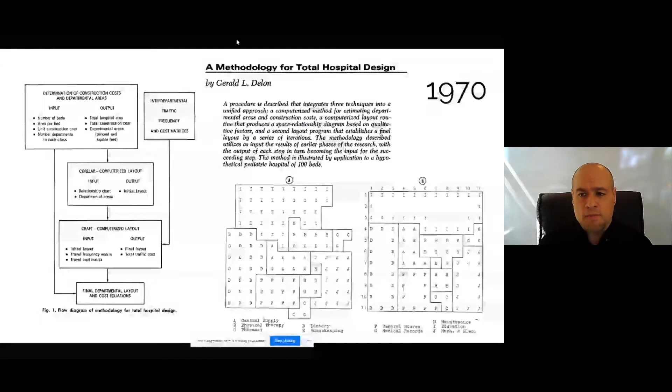So why did we found our company? We have a basic conviction that after working on buildings for 5,000 years as a species, and 50 years of trying to use computers to create architecture, we should be able to start with something a little better than a blank sheet.

Because we think one of the issues in the industry right now is that there's a lot of expertise out there and it's still residing in people's heads. The only way to start delivering that in some widespread fashion is to automate expertise from the source, whether it's people starting out in their careers or folks who have a bunch of projects under their belt and a lot to share.

So how do we do that? What is Hypar? How have we tried to answer some of these challenges in the industry where we're still working off the equivalent of a blank sheet on our computers? You may have dealt with a bunch of different cloud services as we increasingly move to the cloud. They tend to be very targeted towards specific purposes.

Hypar is a cloud platform for generating building designs from crowdsourced expertise. We are trying to provide a way for the industry to marshal and share its expertise while protecting its IP.

And the way we're doing that, I'm going to take you back to math class. You may recall that you had these things called functions, and functions would take inputs of one kind or another—in math, numeric, obviously. But in Hypar, those inputs translate into things like structural systems. And those inputs can also be the outputs from other functions, say something that generates a building envelope.

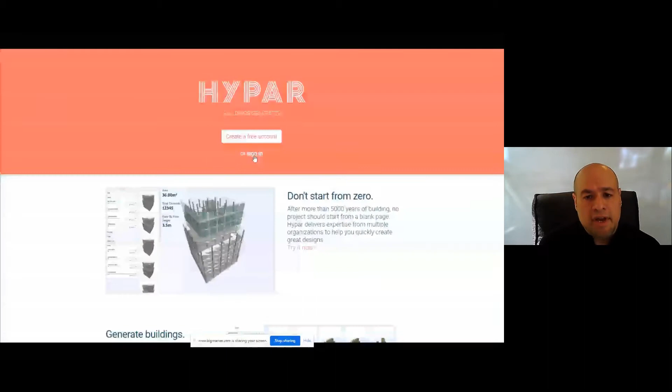But first, I want to show you how that works in practice. So this is kind of a speeded up video that we'll dissect a little bit.

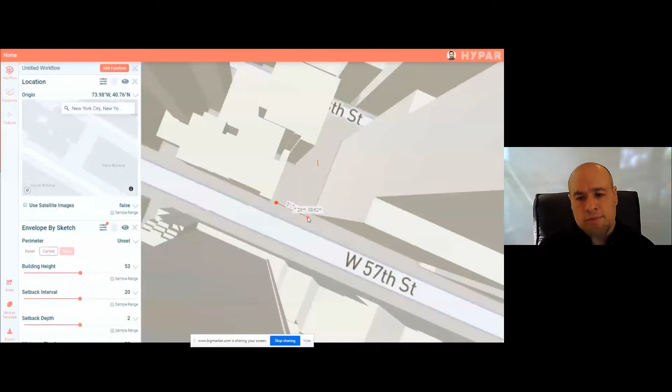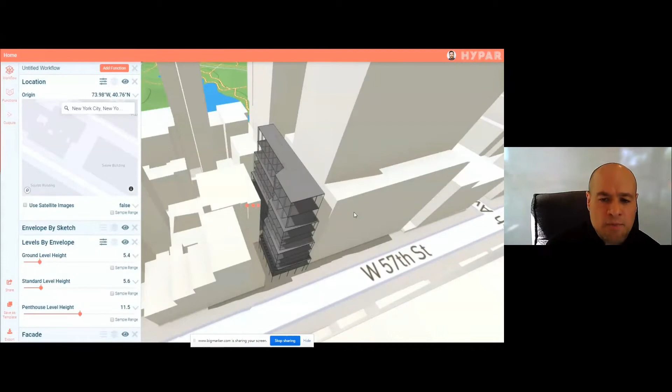And that gets us there. Now we'll start adding other functions that add their own piece to the model: levels, and then floors, a facade, a structure. And you can see pretty quickly you come to the point where you start to have a building proposal.

And then we can do things like analyze one aspect of the building's performance. In this case, what's the view radius at a certain building height look like? And here we see if we stand in just the right spot on just the right floor, we get a view of Central Park in Manhattan.

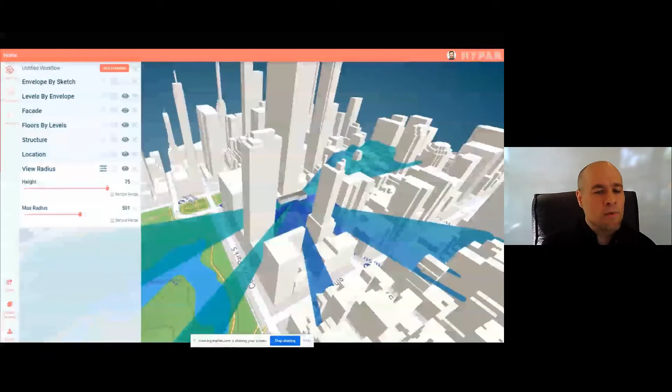So what I'm going to do here is switch over to a live demo and dive into a similar workflow so we can take that apart and see what's going on.

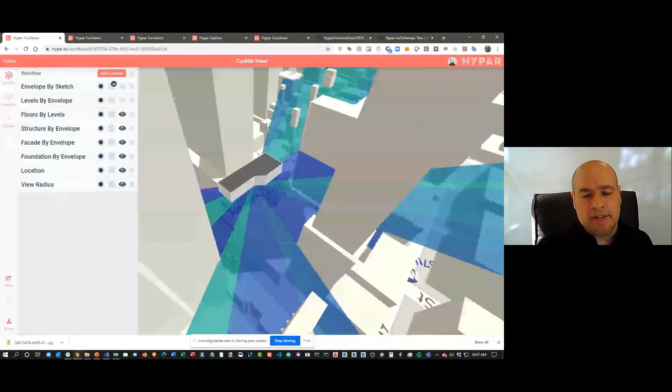So this is our CanBIM tower, same place in Manhattan. And each of these is a function. There's a library of functions you can access that contribute various things to the model, but each of those functions also has its own settings.

So if we do something like make the building taller, for example, we can change our setback intervals on how often those happen. What's happening here is that we're creating a new envelope, and every one of the dependent functions down here, which makes levels and floors and structure, etc., is now working off the new building information.

So what we can do also is when we have things like sample range checked off, we can also look at a bunch of different options that have been automatically generated, because one of the benefits of having a cloud system is you're not limited to a single CPU.

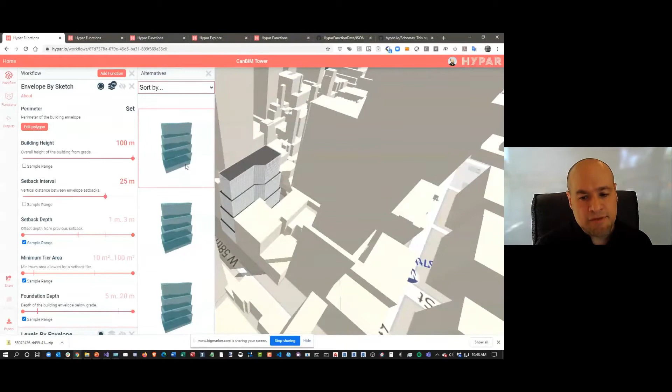So what we do is distribute calculation of options across multiple CPUs. So calculating 20 different options is as fast as calculating one because they're distributed.

So we could even switch off to something maybe dramatically different. Let's see if we can find one of the ones across sample range. Let's try this one with four tiers, and we'll let that regenerate.

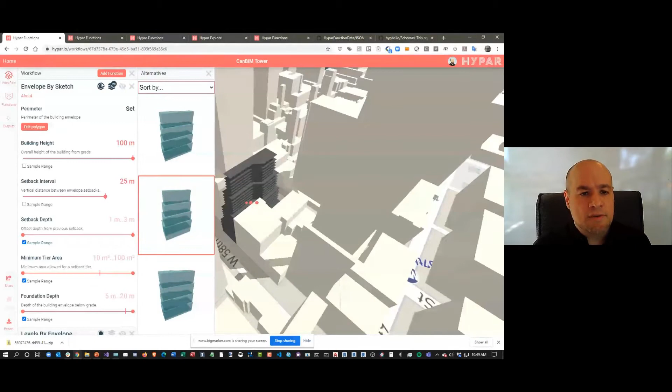So these kinds of options are available in every one of the functions. You can change your level heights here. You can change your floors by levels, and you can change your structure. Let's look at each of those in isolation for a minute, so you can see how each one contributes to the model.

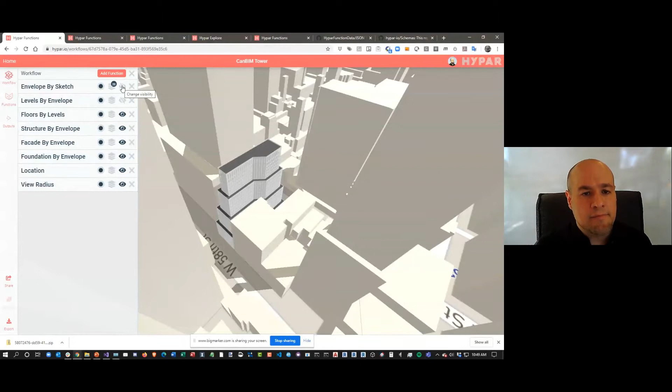So we can isolate each of the functions' output like this. Here, we're not even seeing the location. Now we'll just see the envelope regenerated, and here are the levels and the floors. There's our relatively simple structure. You can see that we just have axis intervals that we can set.

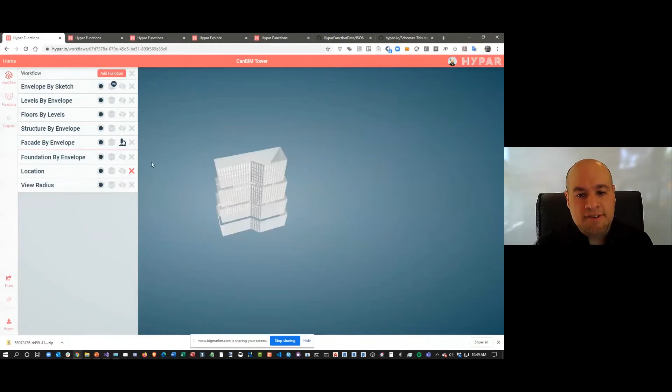Now, all of these things you're seeing here are all available to you on Hypar right now. And if you have a mind to contribute, one thing you can do with a lot of the functions on Hypar is go to About, and often you'll see a source code link. So if you are C# code inclined, you can open another window, and this will take you right to the source code of the function you were just using.

Now, all of this is open source. None of it is directly tied to the Hypar platform. You can use this stuff locally if you like, and I'll go into more detail about that when we talk about what's behind all of this functionality.

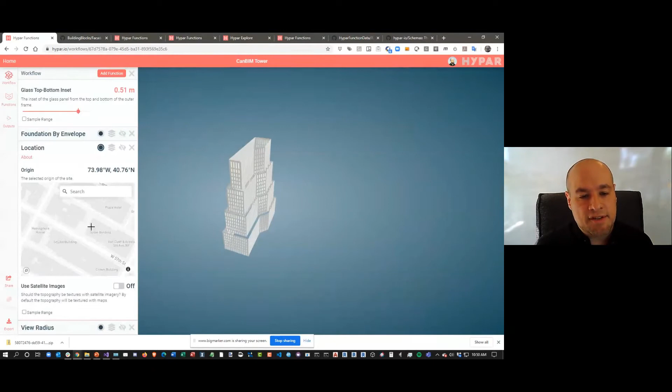Continuing on, we can do things like select different locations, and we can move this entire building to Tokyo if we wanted to, for example. So you have worldwide access.

Now, I will say that we're drawing our information from Mapbox. Your mileage may vary on the validity of the information depending on where you are. We find some really good data in large cities around the world. When you start to get outside urban areas, or even sometimes in secondary cities, the building heights get a little shaky. Just a word to the wise on that.

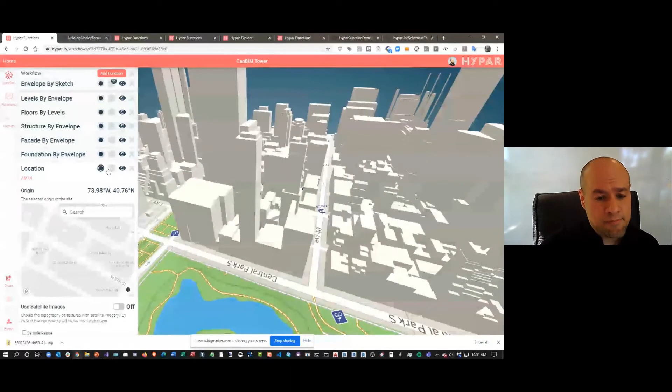Going back to what's underneath here, I'm going to go back to the presentation. So the reason all these functions get to talk to one another and pass off information is, let's say for example, I take out levels. Everything is going to start to complain that it's using levels and needs them, and we can always add those back in.

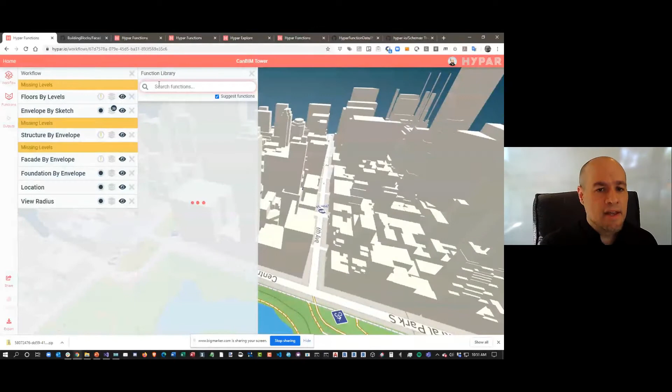But the reason that all this stuff can talk to one another is there's a library underneath which represents the building elements. It's things like site and level and envelope and all the stuff you see me play with here.

This is also an open source library. It is also not tied to the Hypar platform. We have seen people take this library and use it as the basis for operations in Dynamo or Grasshopper, and we'll talk a little bit about that.

But you can take this library and extend it if you're a C# developer and use it to your heart's content. If you have no connection to development at all, you can go to Hypar and use all the functions that people put on there to create your models.

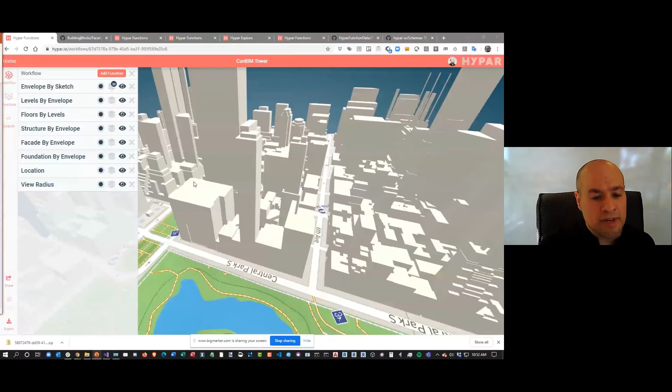And when you finish, I save some time here by exporting, so it takes about 45 seconds. But one of the things I did was export this model as an IFC. And we'll let BIMvision open this up.

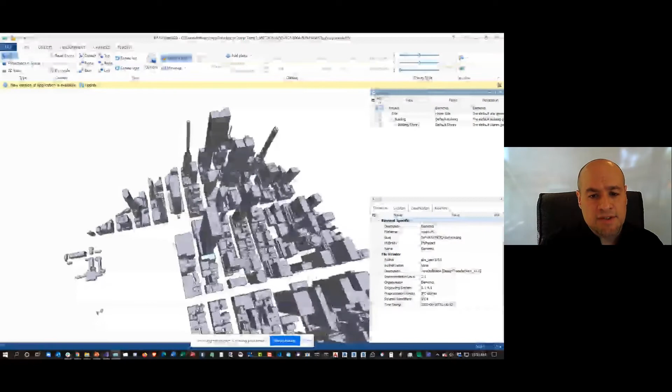And here we've got the whole area, including our building, which is hidden down one of these, next to one of these tall guys here.

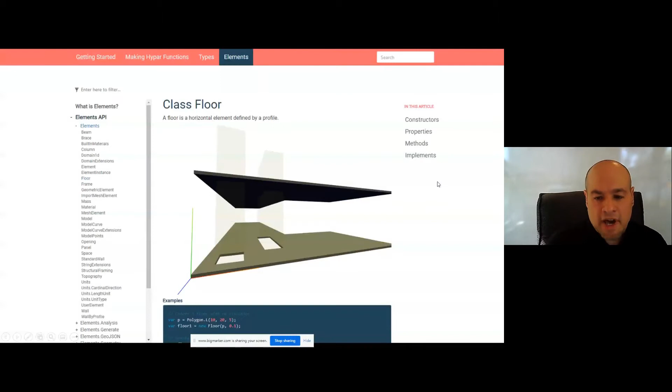Okay, so going back to the presentation, we've got a lot of ways to help you on Hypar. We've got a getting started guide that will let you also extend this data model.

So one of the issues with a lot of data models in AEC is that they come very rigidly categorized. So you end up having to categorize something the developers didn't conceive of. Let's say, on the outside, you have something like an umbrella stand, or an operating room, or a patient room that you want to represent. And of course, large pieces of commercial software can't think of every single thing you want to represent.

So one of the things we did with the Elements library is we made it extensible. So if you add something to the Hypar Elements library, you don't have to talk to us about it. We never have to know you even exist, but you can actually make a first-class element that the platform will recognize, or the rest of Hypar will recognize if you're using it just on your desktop.

If you're interested in how that works and you want to develop it yourself, there's a GitHub repo called Hypar-IO schemas. These are individual schemas that describe things like levels, level perimeters, mullions, the building envelope, etc. You can see how that's done.

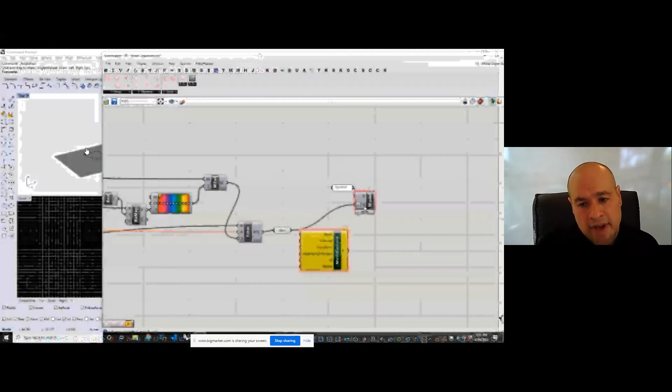So one of the things we've added recently is Grasshopper compatibility. Here, Andrew Heumann, who's on our staff, is working on a Grasshopper script that generates a mesh skin for a building, and then he'll add some rainbow colors, and you'll see it flash in the upper left corner as he adds them.

Then he takes the Grasshopper script and adds a new function, and he just drags and drops it right into Hypar, and given a few seconds processing time, we'll actually wrap that graph up into a functioning Hypar entry. The nice part about this is that now it will work with all the other Hypar functions.

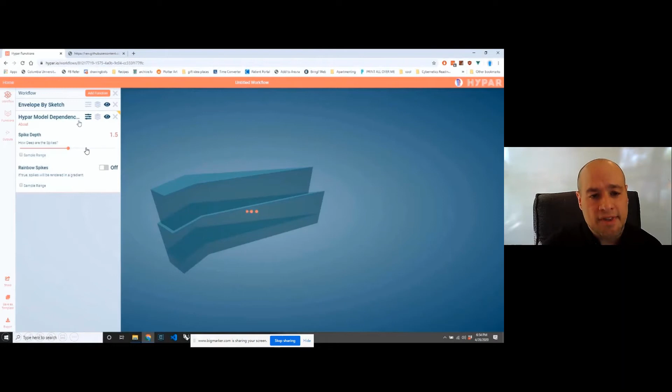So here, envelope by sketch, written in C#, is now working with this Hypar model dependencies thing that Andrew's created, to add this rainbow facade onto that building envelope.

So your third alternative for putting something up on Hypar is using Excel. By naming cells in Excel by inputs or outputs, we can automatically translate this into the Hypar interface.

I think I probably don't have to outline for this audience the nightmare of the emailed spreadsheet that gets out of date and numbers change, and you're making business decisions on the basis of it, and maybe you make the wrong one. This is another way to distribute just a raw spreadsheet around a company so that people can use a canonical copy of it.

And you can make some adjustments to the spreadsheet and how you want the interface to work on the way in. What's coming, hopefully at the end of this week, is an ability to hook this directly into outputs of the rest of the model.

If you wanted to feed in your square footage or square meterage from your building and get outputs like your cost basis, your loan value, etc, and what your projected income would be, you could make a spreadsheet like this. We did that because we know there's a big chunk of expertise in the AEC industry residing in spreadsheets spread around firms, especially in engineering and real estate.

There is a Grasshopper package up on Food4Rhino called Hypar Elements that will supply you a bunch of pink-outlined nodes you can use to integrate with Hypar. We have instructions on starting with Excel. There is a Hypar Dynamo package on the package manager if you're a Dynamo user, and there is a sample Dynamo script to show you how to extract information from Revit.

So I'm going to pop into the live demo again to show you how that works, or at least the results of it.

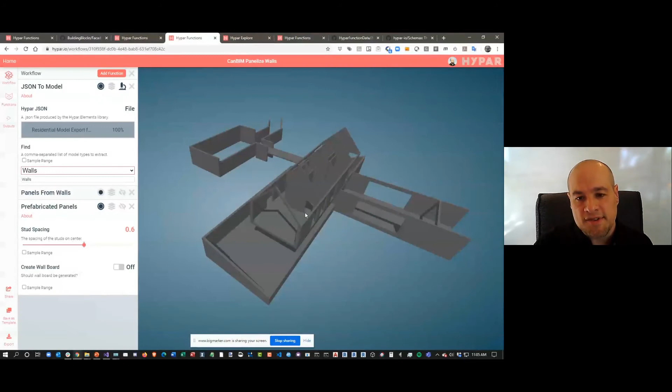Those of you familiar with Revit will probably recognize this guy. This is the architectural house that comes with Revit as some of the default content you can use. What we've done here is use a Dynamo graph to extract walls and floors out of Revit, and we'll talk more about that in a second. Then we've dropped it in here.

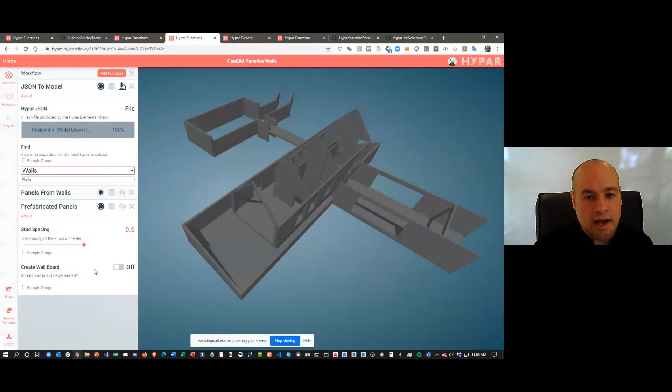I'll do it live in a second. Let me show you some other results. What we've got here is three functions: one, this JSON to model that I'll explain in a moment; one, panels from walls; and one, prefabricated panels.

If I isolate each of these in turn, you'll see that we've taken the walls and floors we extracted from Revit and isolated that. Now we've panelized all the walls here according to the length and corner length in the function. And if we isolate prefabricated panels, we'll see that we also have framing inside every one of those panels.

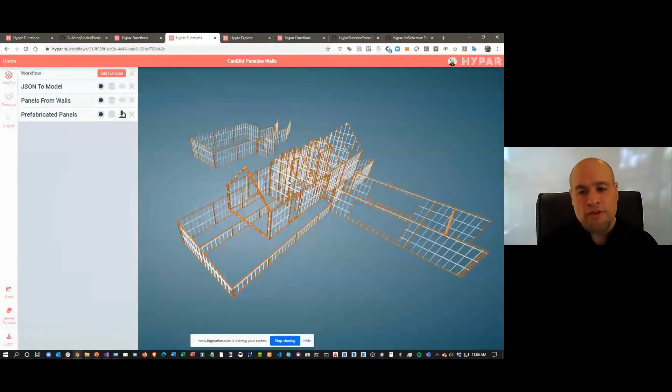So this is how we intend the platform to work, where people can just add new functionality whenever they need it onto existing functionality, to do something that in this case is even more detailed than merely panelizing the walls.

If you're interested in this kind of thing and interacting with data you pull out of Revit, there is a repository on GitHub with all this kind of information, and I'm going to use some of it live now so you can see it.

So from my local copy of that repository, we've got these JSON to models, and we've actually got the Revit 2020 models that exist on the GitHub repo. Then we've got the extracted JSON versions and the Dynamo graph here that created the exports, the exported JSONs that you see.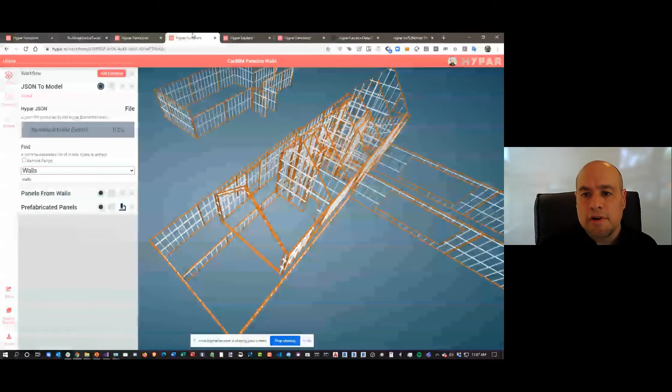So if we go back to our workflow and change up our JSON, let's switch over to the commercial model instead of residential. And so that gets uploaded. Now, like you see in other Hypar functions, everything else is responding to that change by producing panelization and framing.

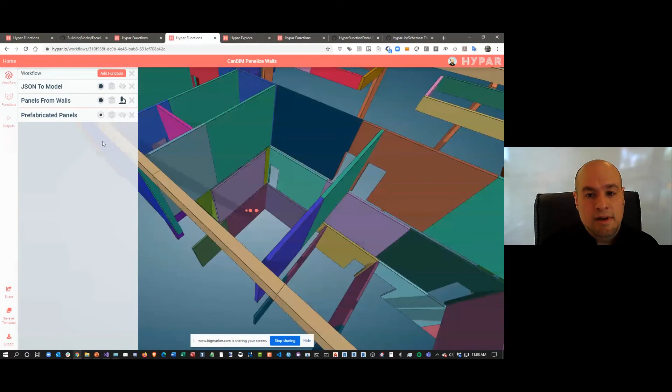We give it a few seconds because we've only got the prefabricated panels isolated. Or in fact this one's done, so maybe we can isolate that one. You can see that the commercial model has been panelized, and in its raw form it looks like this.

And then if we go into prefabricated panels, if it's done calculating—there we go. We've got the panels again on a completely different building. So you can do this yourself with the Dynamo graph, if that's the kind of thing you're into, to try this out.

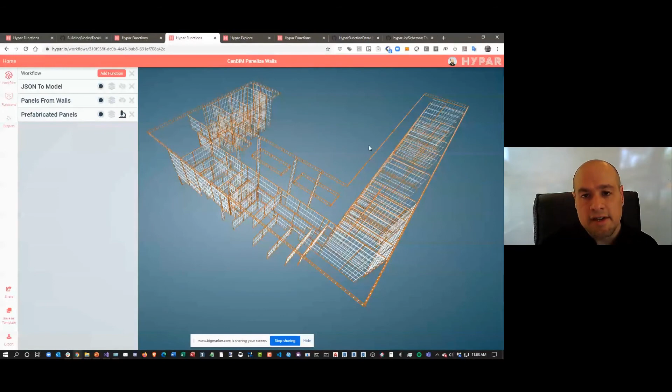And so this repository, I'll just look at my local copy—it's probably a little easier to see—has source data for a number of Hypar functions. So we can go to, for example, DXF to floor.

It's what you imagine: taking a DXF file and turning it into a floor outline or a site. A sample Excel spreadsheet for you if you want to try out the Excel to Hypar functionality, some extra JSON files from other Hypar functions that you can try or read, and the JSON to model.

And then program by CSV is actually a building program you can use to generate a space program in the function of the same name. So going back here to our presentation—this is the Dynamo file that you'll find to extract the walls and floors. Feel free to take a copy of this and play with it.

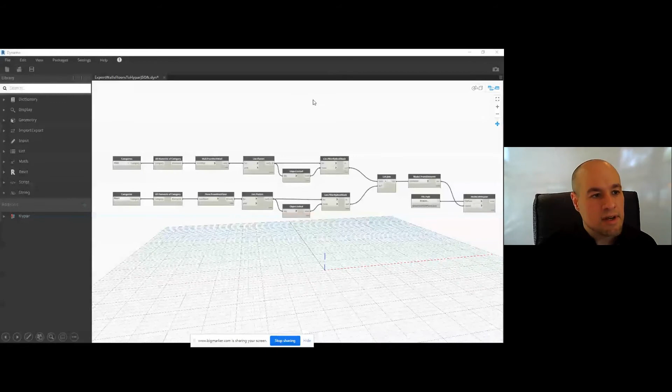As I say, we've got the function data, and then we've got a few things we're working on next. As I mentioned, the next thing we'll probably have out, hopefully by Friday, maybe next week, is a way to reference elements into your Excel spreadsheet. So for example, if you have a bunch of floors with a certain area on each floor, you could aggregate the area and figure out your cost or whatever it is you need off your floor area.

We're working on desktop software integration—it's Revit. So what we're doing there is we're actually going to have a real-time interchange with Revit on the desktop. If you're generating stuff and want to bring it into Revit, or send stuff from Revit back up to a generative process on Hypar. We're looking at Revit family interoperability.

That'll be done probably in about 2 or 3 months, where we start bringing in Revit content, for things like piping systems or furniture and that kind of thing, if you want to bring that in. We have in process right now an optimization library.

We're working on one project around space planning that works using an optimization module, and we'll probably have a few of those. Python compatibility, which we have working behind the scenes, but we haven't exposed yet because we're still making sure it's stable. Some better model visualization for things like element selection, data visualization of results, and some better model element interaction.

So let's look at a couple of these things. Going back to our original tower way back here, one of the things we can do is make this quite a bit smaller by going into envelope by sketch and editing our polygons. We can take out a couple of these, take out a node, fix it there, and then just update it.

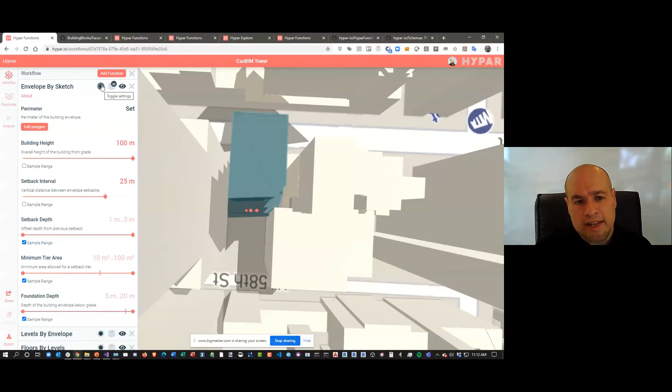And again, all the other functions will update. So there are functions already on Hypar that let you do things like put in a new perimeter, or as I promised early on, we can even swap out functions. So if we want a different way to make an envelope, we could do something like envelope by centerline, and then we'll get an error that multiple functions are producing envelopes.

So let's get rid of that one. And then let's draw a new polyline, say from here to here, and let it go.

So this is kind of the power of having an open system. You could contribute your very own way of making a building envelope into this, and then everything else will respond to whatever it is you put. And I think I've just put my building in the middle of the street, so there'll be some complaints about that. But anyway.

Okay, and that about wraps it up here. So I'm gonna open it up to questions and see if Dave, if you're still there, are there any questions on the queue? I'm still with you. So far, I have one question. I also tabled one of my own in case we ended up with extra time.

The question is, what is Hypar's business model? Are you a not-for-profit? We are not a not-for-profit. We are a for-profit company. Our business model will be subscription. There will always be a free tier. Everything on Hypar is free right now. Toward the end of this month, we'll be turning on subscription.

There'll be a couple of levels. It'll start out as $19 a month, and then I believe the second tier is going to end up being around $39. There'll be various types of functionality attached to each tier. On the free tier, essentially the limit will be how much computation you can do in a month, and we're still kind of playing with those levels, but we want to make sure that people can do some useful stuff even on the free tier.

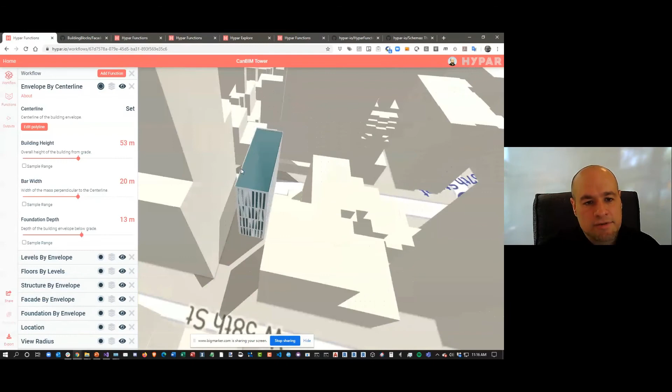Let's bring up this. So let's say after this seminar, you try this out and you think you got something really cool and you want to share with your colleagues. There's a share button down here, and you can either send individual access to email addresses, or send just a link to anybody you like. When the person gets this, if they're not the owner of the workflow, they'll be told they can make a copy of it and work on it. One of the things we have probably about 4 months out is real-time collaboration between folks.

And I think we're going to have to deal with the permissions model right then, Dave, because obviously everybody stepping on the same function would probably be a problem. But yeah, right now you're kind of sharing wholesale.

Anything you end up trying from the Grasshopper, Excel, or C# side development, everything you upload is automatically private, meaning only you can see it. Right now the dichotomy is it's private or entirely public. But if you talk to us, we have behind the scenes a way to create what's called a team. For example, if you work for a large 3-letter design firm and you'd like your functions to only be visible to your colleagues at the firm, we can make a team focused on your domain, or a team focused on the list of folks you'd like to have access. That's part of the corporate account management thing we have under development, so you can control that kind of individual access, because we understand that's going to be important for folks.

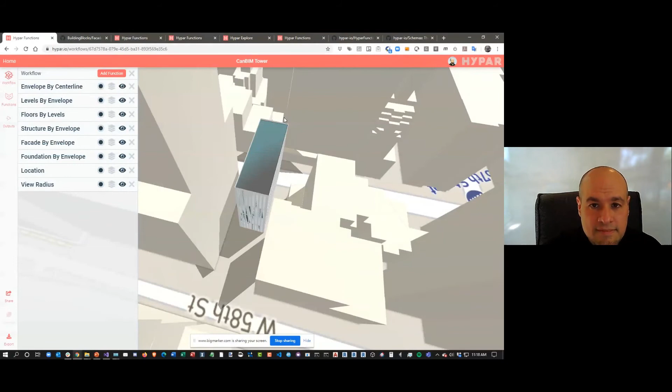As a cloud service provider ourselves, we're occasionally asked about high security projects. In many cases, especially government projects, they don't want the data to live in another country. They want it to live in Canada. Can you talk about your infrastructure there and whether it's Canadian, and give that sort of reassurance?

So underneath this, we use AWS. If there was a data sovereignty issue, we would look to spin up against an AWS facility in the target country. One of the things we did in designing the whole platform is also make it somewhat loosely coupled to the service provider. So if there was a very good reason, we could actually also spin up a Hypar platform onto Azure, for example, or even GCP. It would have to be a very good reason to do that, but it is possible. We designed the whole system with that idea in mind.

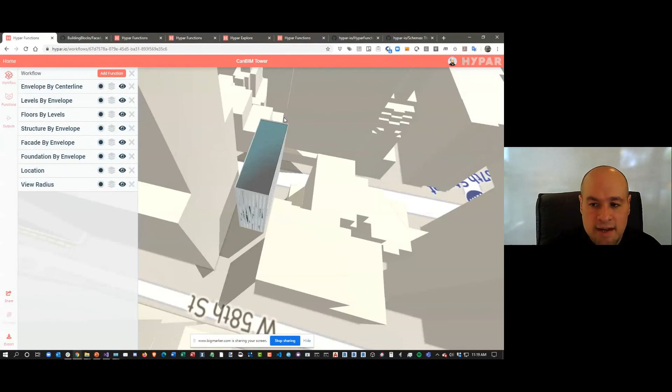And actually, you're giving me an opportunity to address one more thought here. Much of what you guys have seen today is open source. So you can go get the Elements library. You can get a lot of these functions, like if you wanted to find out how we did the facade, you could go pull that code and use it for your own projects on Hypar or off Hypar. We don't really care. But one thing you'll see that is not open source is the platform itself.

And there are certainly business models like Discourse, a good example, which is a company that provides forums for websites, and their entire stack is open source. You can spin up your own Discourse on your own server. They don't mind - that's their business, but you don't have to.

And we kind of constantly, about every quarter, debate whether we should open source the entire Hypar platform for the industry. The reason we have not is one of the things we're afraid of is that we will be contributing to a problem we're trying to solve. If we do that, we're worried that people will take the Hypar platform, put it behind their firewall, make their own ecosystem, and never ever share. So for now, we're reserving the Hypar platform as a centralized place, because what we see is too many walled gardens around the industry and not enough sharing.

And by contrast, one of the strategic approaches we're trying to emulate is what happens in the software world. For those of you who have any kind of consciousness of what goes on, somebody like Facebook will release React, which is an entire UI framework, and they'll give it away.

Thanks, Anthony. No new questions, so I dreamed up another one while you were talking about open source.

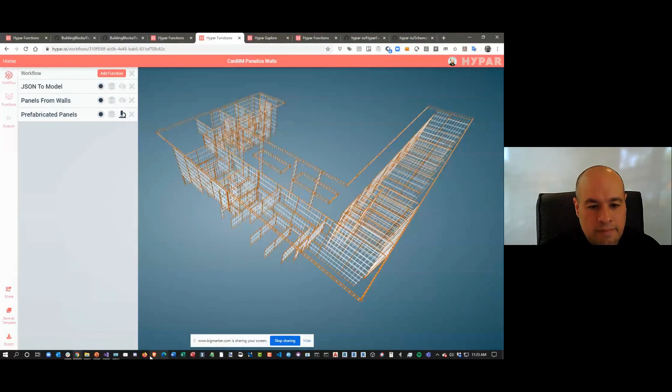My thoughts, putting my Building Smart hat on, I did see a reference to an IFC file in there. Can you describe your support for Building Smart standards, importing or exporting IFC files or property sets? Give us an overview.

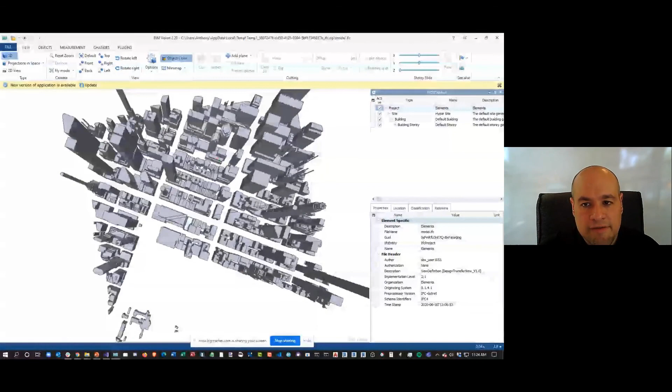Yeah, you can do both. Of course, you're always limited by the thing that's reading your IFC file, and we've run into that with Revit and a couple other readers. It seems like we can't quite always get all topographical context out, but we are IFC 4 compliant.

And we try to... let's go over here, sorry to make everybody dizzy, I'm just zipping around the model. But we can even do that. We might have just enough time to do this live.

Let's pick another, a different model. Let's go into... I don't know, I'll do another demo for a layout, and let's see if we can export this one. So there are 3 formats we can currently export.

One of the reasons we're working on Revit compatibility is to make these kinds of results go directly into Revit, but right now you can hit IFC. This takes about 45 seconds or so to spin up, so I'll just banter over it, I guess.

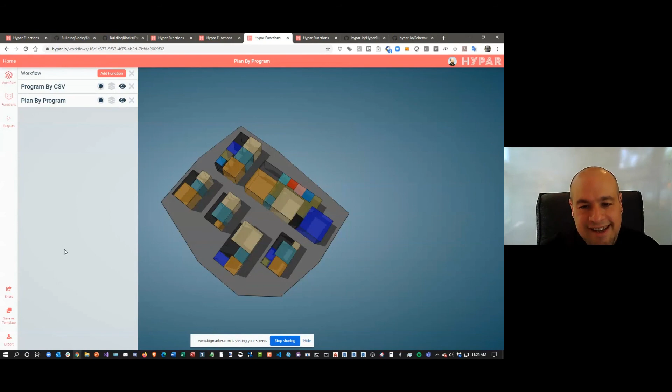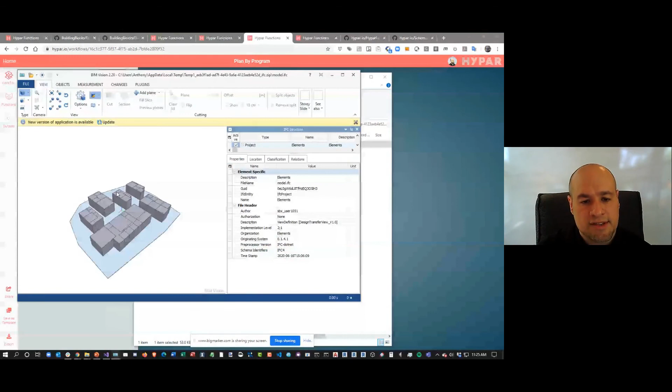In any case, we try to remain IFC 4 compliant. With things that do not fit into the IFC universe, we use the IFC proxy object, and I imagine as we get our Revit compatibility pulled together, we'll end up doing some things either in the generic category or in direct shape rendering inside Revit.

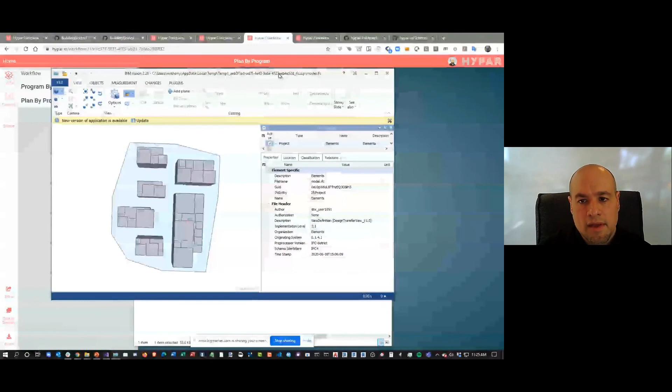One of the things people also ask, connected to your question Dave, is why not use IFC as the standard? I will say we really tried to use IFC as our data standard. It's a data standard that is largely designed for interoperability and archival capabilities. It's not very technically astute when it comes to using it for web handling and data transfer on the web.

So that's one of the reasons we developed Elements. We looked very closely at IFC and Revit's data structure and tried to make a happy medium, taking advantages from both, but also making it open-ended for folks and usable outside the context of Hypar if people find it helpful. So we're trying to stay compatible with popular standards.

But all this stuff is written in a way that is open-ended as far as maintainability over time, because it's an open standard, because you can read it. It's the kind of thing that any competent developer would be able to look at and understand how it's working, and you could even make your own parser for this kind of thing.